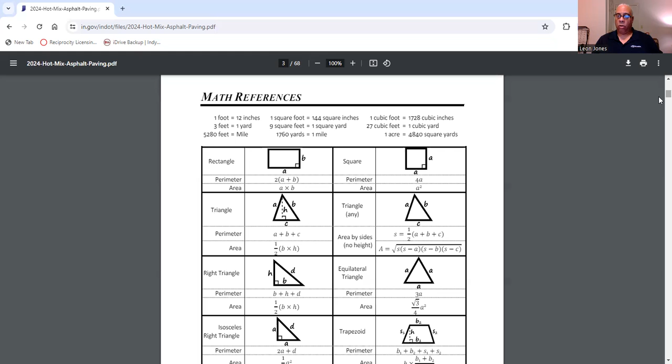Now, when I'm out there inspecting, this right here - the rectangle, square, trapezoid, and right triangle - they're my favorite. Very easy. You're going to have to use these shapes when you're out there getting quantities. Again, you're going to have linear feet or feet, square feet or square yards.

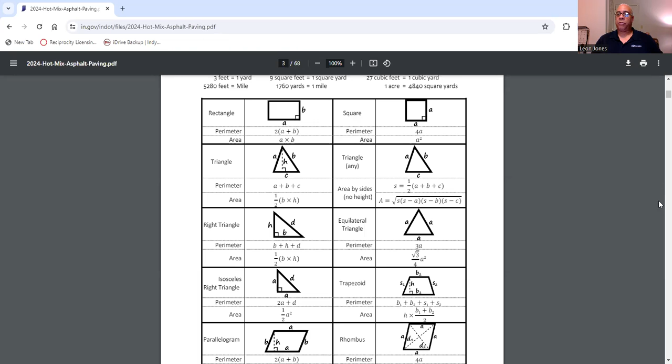Does that go with asphalt? Absolutely. So these are all the shapes you need, and these are areas of circular segments as well.

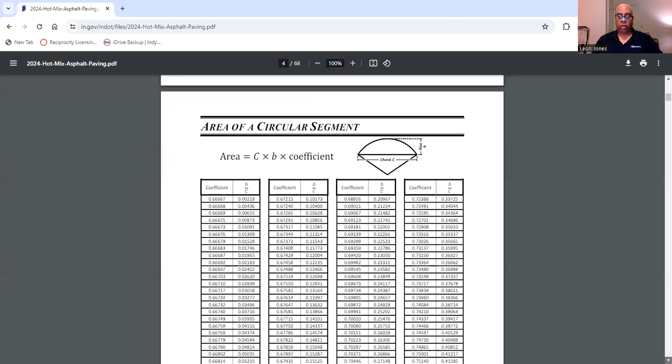But basically, when we get into hot mix asphalt, we talk about the terminology, the type of equipment used for hot mix asphalt, and how you sample it.

Now, like I said, this manual goes into pretty much depth. If you're going to become an inspector for INDOT or a consultant, you go through this manual, you read it, and there's a workbook.

I will tell you, there are some people who don't understand the workbook. If you don't understand the workbook or the problems, email me the problems, and I will do the problems. I will scan them up and show you how I got the answers. Or I can go on Excel and do them for you as well.

Here with Zoom, I've got to learn how to use the whiteboard feature. But first of all, when we deal with asphalt, from this manual...

You're going to have the terminology: HMA, hot mix asphalt, bituminous concrete. These are all names for asphalt. Basically, asphalt is a black cementing material that varies widely in consistency from solid to semi-solid at normal air temperatures. That's what it is.

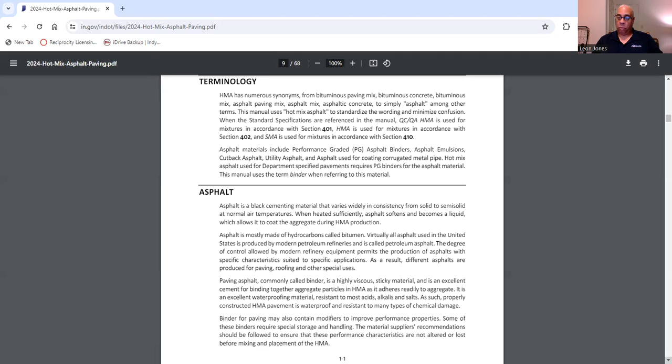But number one, you must download this manual, read it, and get some specifications. It's the same thing I had to do in college. I believe the test might be open book as far as getting into the specifications. Also, learn how to read plans.

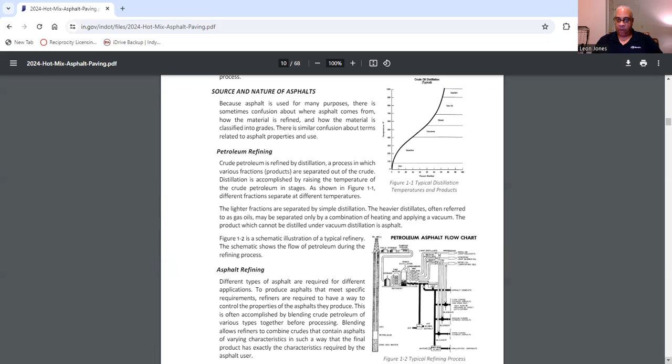Now, you're given a definition. You're also given the source and nature of asphalts, asphalt refineries or refining. This tells you how asphalt is made. Understand the process of where asphalt goes - it goes from the aggregate to the plant.

And what they basically do with the aggregate is add tar to it. Now, when they test the asphalt, this is why you have to have cores. They take the sample, put it in an oven that's about 1,000 degrees so they can burn all the tar off of it. And then they're going to run gradation.

Gradation is when they shake it with sieves. One thing you need to understand when it comes to asphalt: understand the process, understand why rollers have different rolling patterns. Understand that you have to have compaction.

Now, here in Indiana, remember, we're not using the Trexler or the Troxler 4640 nuclear density gauge, but we're using something for your contractors. They're using a non-nuclear, not an SDG, but a Trans-Tech non-nuclear density gauge. It's known as a 380. I think it's a PQI 380. Looks just like the 4640.

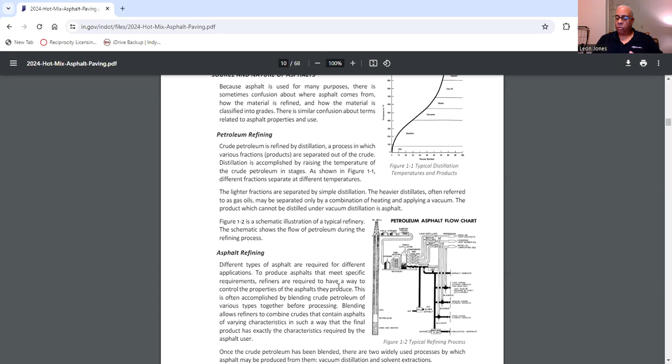Now, generally, when you're out there inspecting, it's very important that you watch the contractor. They could be putting it down too thick or too thin. This manual is going to tell you everything, but you got to read it.

Talks about, here we go, hot mix asphalt, just mentioned it to you. The paving courses: base course, intermediate course, surface course. Now, what's the surface course? The surface course is actually at the surface, that is what is laid and we ride on it. But you have the intermediate/binder and the base course to support it.

And one thing, when we're out there inspecting, you make sure the contractor puts tack. Tack is that black tar. You put tack, and if there are joints, got to put joints. Seal those joints.

You also have dense graded. You have open graded. Now, basically, when we deal with open graded, it's got larger crushed aggregates with really a small amount of fines, and dense graded has small and fine aggregates.

One thing you also need to understand is the design mix formula. Now, generally, when you're out there inspecting, they're going to bring you a design mix, they're going to bring you a certification. This right here tells you the mixing process.

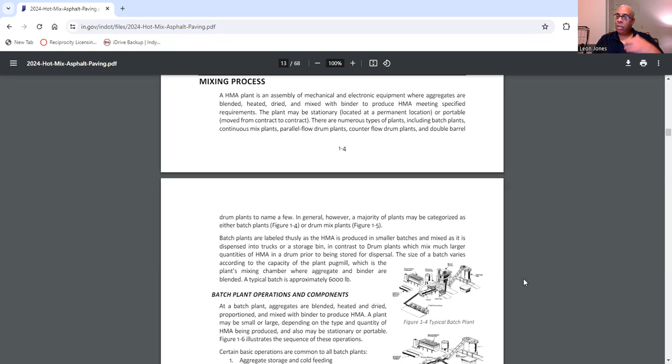What I'm doing, you all are joining me, I'm going over this technician manual. You're going to need to study it because some of these questions, what's a batch plant, what are the different courses, they may be on that test. And in order to pass the test, you need a 70 to pass. Some people can't pass. And you need to understand the procedures. I'm giving them to you right now.

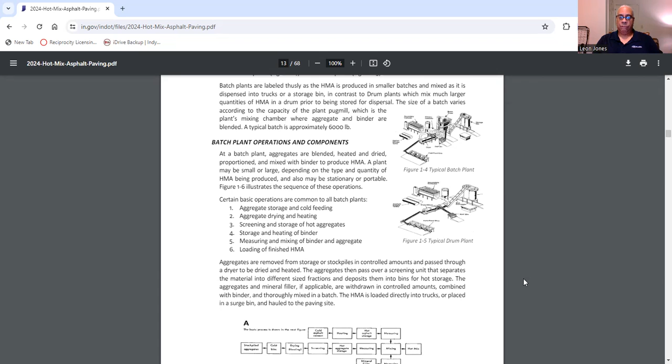Here are the components of a batch plant. You have the batch plant, and you have a drum plant. Everything is right here. Let's give you an overview, understand the process, the batch plant operations.

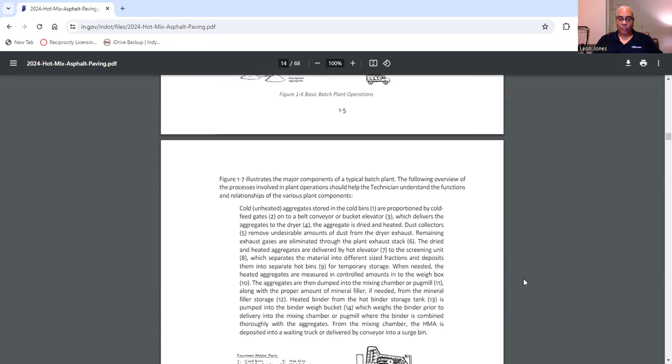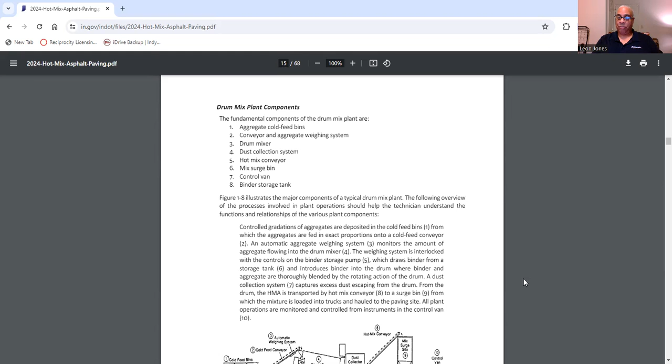Also, I'm just scrolling down. It's going to tell you what drum plants are, batch plants, the components. I actually have a video that I did months ago about this. You're seeing it again, but you need to make yourself familiar with everything.

Different mix composition types. Now, when you are doing asphalt, make sure the contractor has a quality control plan. And the asphalt, now, I want you to understand this.

If they're putting down approaches, you look in your items or your CIB. This is very important because if it's QC, QA, you have to test it. If it's not QC, QA, you don't have to test it at all.

And again, when you are testing, follow the frequency manual. This is all in the ITM, Indiana Test Methods. I know 580 or 583, that's sampling. Quality control plan, everything is linked up to the specifications. You want to pass that test, this is what you have to do.

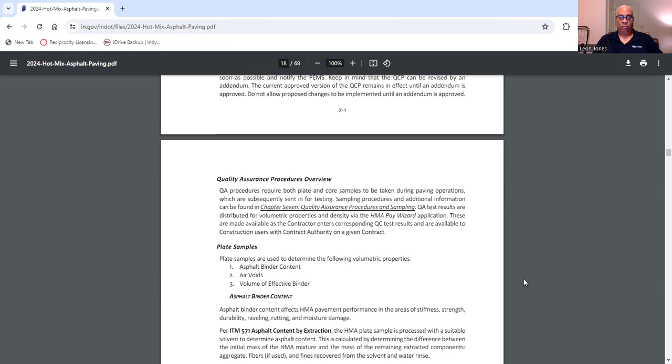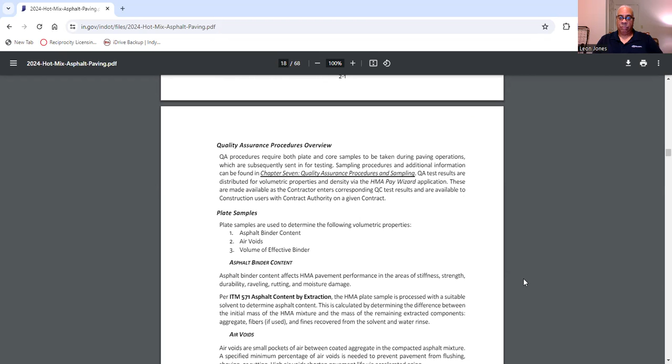Now, wire plate samples used again for the voids, effective binder, binder content. Right here, you're being told about air voids, core samples. Core samples are to determine your in-place density.

And one thing, when you're doing asphalt, density is very, very important. The reason why density is very important, I want to see whether it's meeting the load requirements or the ESAL. The ESAL deals with axles. There could be 0.3 to 3 million, 3 million to 10 million.

Deals with axles. Now, in some states, it used to be this long piece of equipment, it was called a profilograph. What that profilograph measured, it would create a printout. It would measure smoothness. If you had bumps, you'd see bumps in the graph. Not many places use that piece of equipment anymore. They're using a van instead.

IRI, that's wheel roughness. This tells you about cores, smoothness.

Different types. When we're dealing with surface, you're dealing with 9.5 millimeter, 370. Well, some places use 70, some places use 64. Generally, 64 is used on the shoulders, 70 is used on your main route.

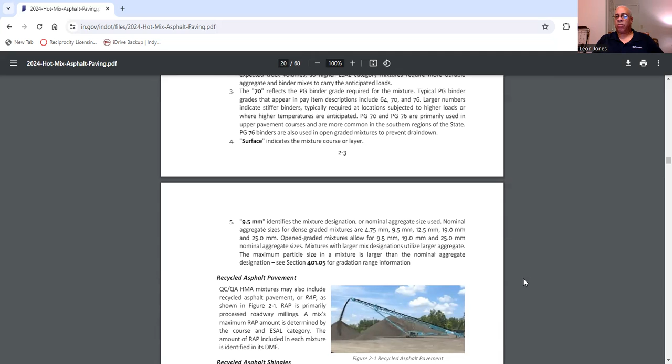Now, what that is, the contractor, when they mill off the existing asphalt, they save the millings, they take them back to the plant, and they recycle them. And that's asphalt, it's what we call asphalt, RAP, recycled asphalt pavement. And then we also have RAS, recycled asphalt shingles.

We're in the green. And when we mean the green, yeah, the green means money, but also the green means sustainability.

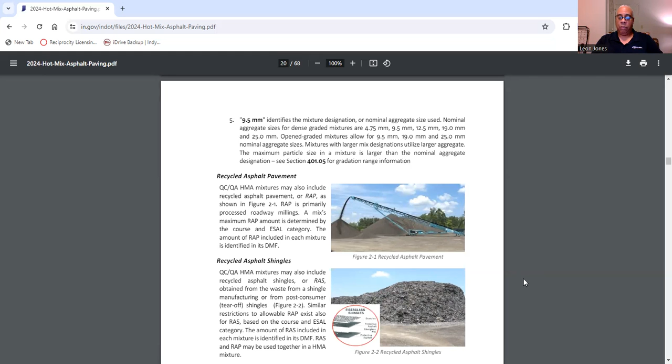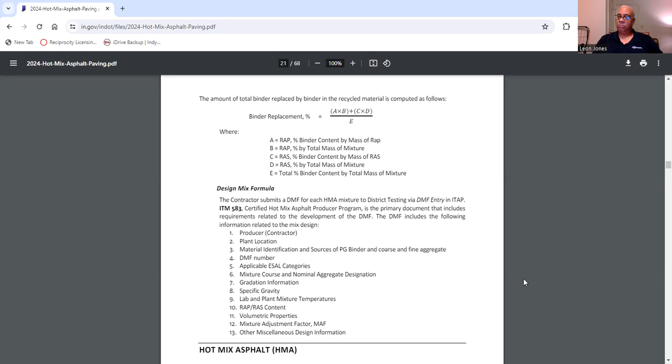And I'm just taking you through more information. This is what you have to have when you are utilizing or checking the design mix formula. I'd say you're basically checking the design mix formula.

When it comes to quality control plan, your contractor should have a QC plan. Pay item description, that's right there as well.

402 HMA pay items have a 402 mix type. Yeah, types B, type C. Then you have SMA, which SMA is your stone matrix asphalt. It's just a little bit more expensive, more stone. It's real good material.

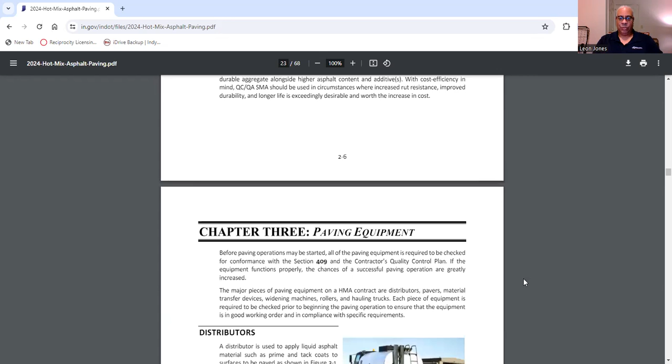Now, what you need to understand too, as I move on, paving equipment. And you have your distributors.

Now, when you're inspecting your asphalt, you want to make sure that the contractor's distributors are correct. When he puts tack down, you want to make sure that that tack is going to be brown when it's laid. When it breaks, it turns black, but you want to make sure that all of the nozzles are working. If they're not working, you're going to have to tell the contractor to stop tacking until they get the nozzles to work.

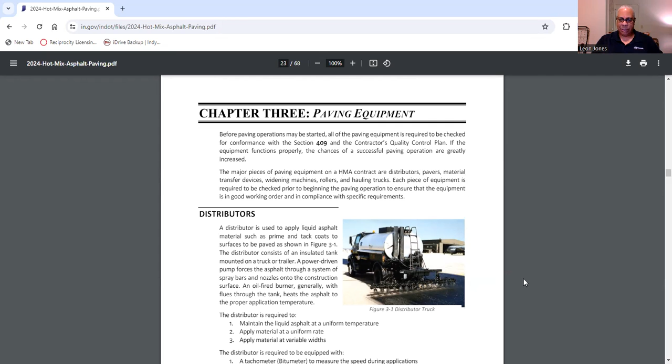You have to have the liquid asphalt at a uniform temperature, and it's got to be placed at a uniform rate and variable widths as well. That's the tack truck. And you got your pavers.

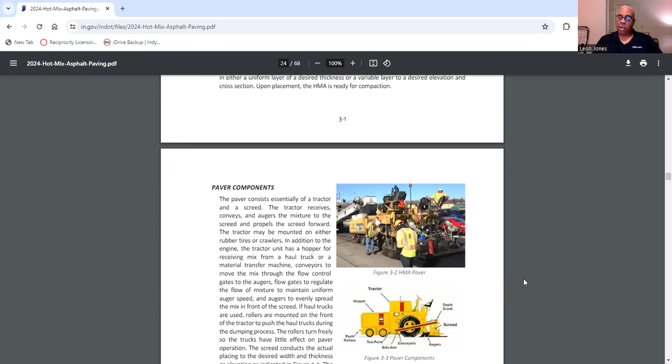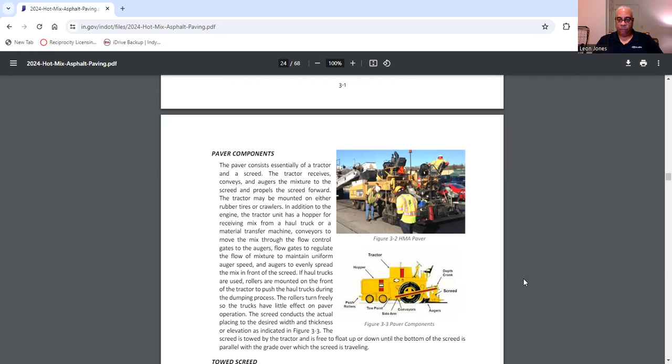Most of the contractors use what we call a Blaw-Knox paver. That's what this one is. It's got your components, your tractor, your screed, your augers, your conveyors, which a screed looks like.

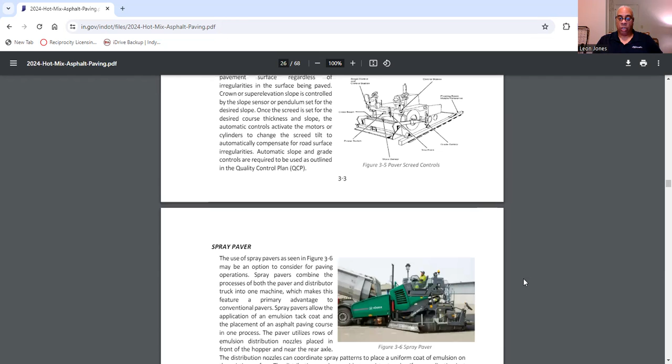That's what these screed controls look like. Pavers come in different sizes.

Then you have MTVs. Your MTV is your material transfer vehicle. Aggregates all of the material, keeps it mixed.

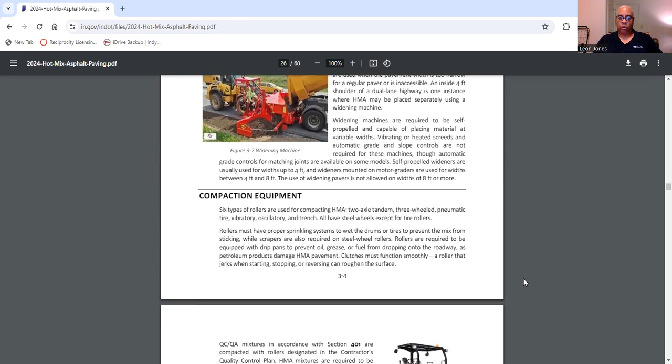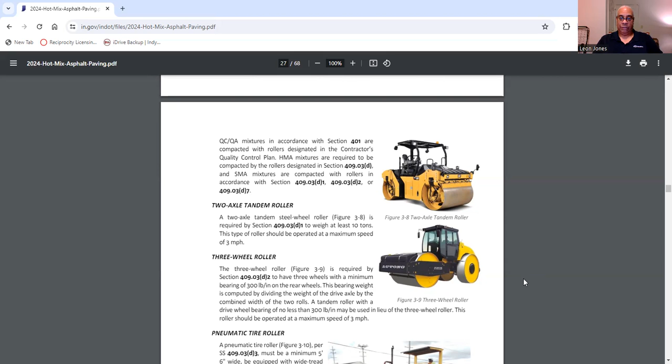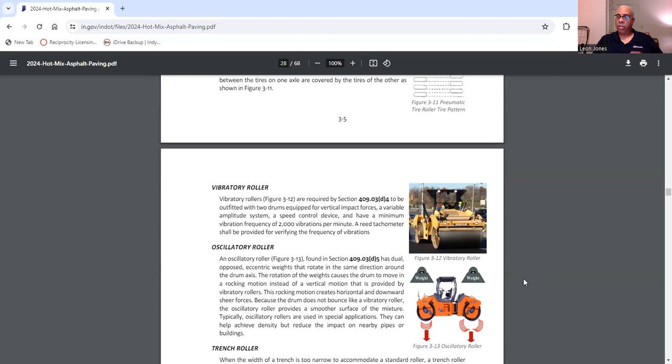Compaction equipment is basically your rollers. They're your rollers right there. Again, pay attention, you need to know this when you're out there inspecting. Some of this information may be on your test. There's two types of rollers that they use, static and vibratory.

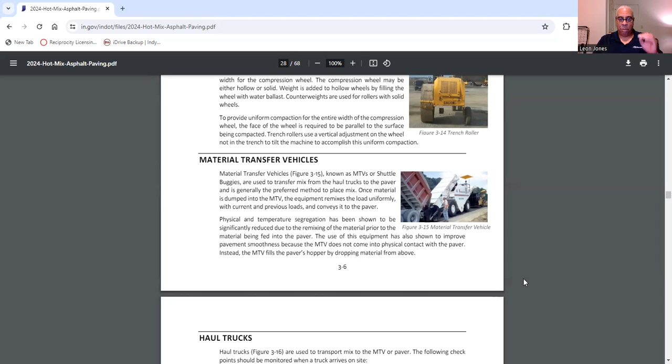And MTVs, again, call them shuttle buggies. They use to transfer mix from the haul trucks to the paver, and it's generally the preferred method to place mix. I just told you about the segregation.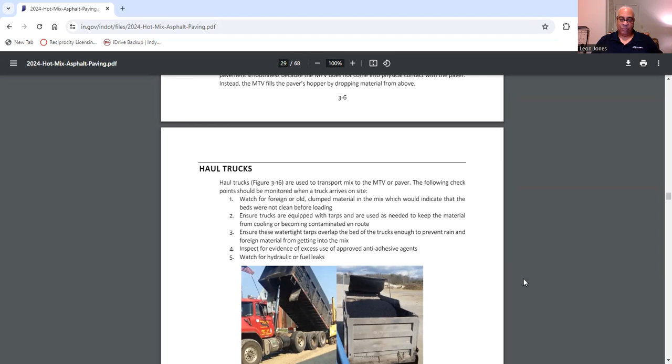Haul trucks, generally your dump trucks. Generally, your dump trucks have roughly on an average 20 tons. You have some of the longer ones that have 23 to 25 tons. You have your hand tools, like your shovel.

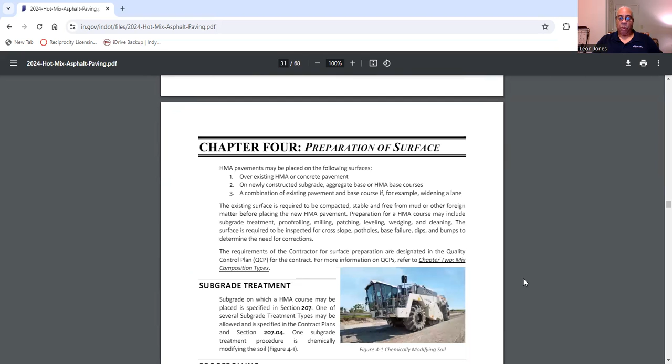Preparation of surface. Now, how do they utilize the surface? Well, some utilize subgrade treatment, like a chemical. Proof rolling, that's when you're working down there on the base.

Now, here in Indiana, if they're putting subgrade treatment down, you have to use a piece of equipment called an LWD, which is a lightweight deflectometer. And then, or you put anything down on that base, you have to see if it's pumping. And what I mean by pumping, is there water? If there is, mark out the areas where you have water. You have to cut that portion out.

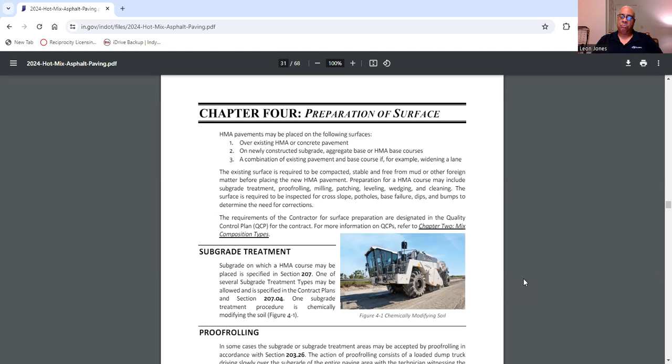Let me see, milling. Milling is when they take the old asphalt, put it in a dump truck, hauls it off. The millings, again, are used to create what we call the RAP, the recycled asphalt pavement. What a milling machine looks like.

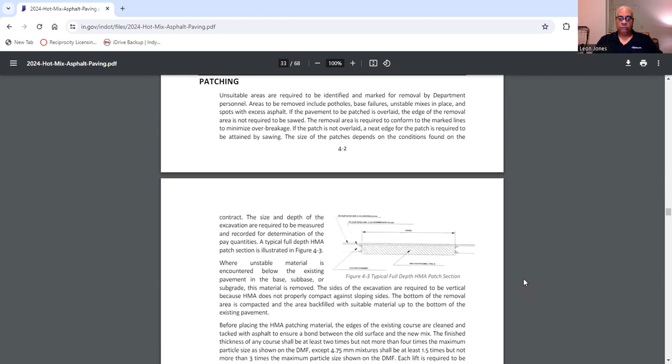This is some of your equipment, it's patching. Make sure they wedge it. And contractor, I know on the INDOT project, you can keep it open for 7 days. I tend not to let the contractor keep it open that long.

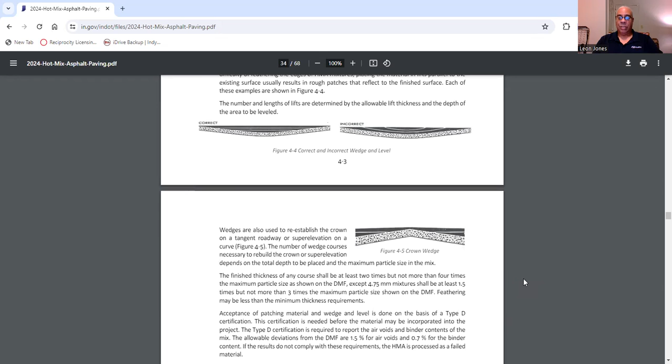There's signs out there that say rough road or uneven pavement. Surface cleaning, you got what we call your sweeper trucks, your tack coat. That's what it looks like. See how uniform it is?

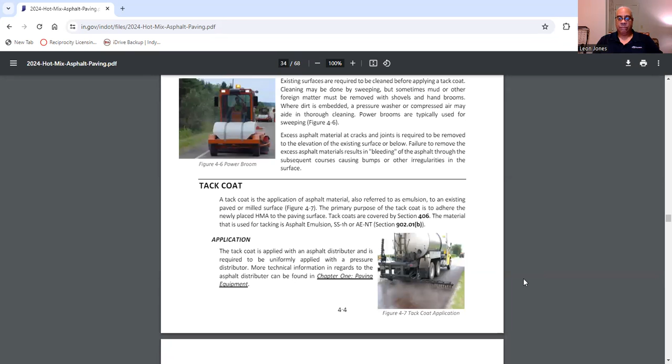Now, this is what I don't like because the applicators on the tack truck weren't corrected. You have no uniformity. I would make them tack it again.

Prime coat. All this, by the way, all these procedures are in the 400 section of the INDOT specifications. So even though you can pass a test, you must be familiar with the plans and specifications.

Mixed placement and compaction. Again, you must understand the temperatures, must understand what QA/QC is or non-QA/QC, air temperatures, surface temperatures, because there's certain times that you cannot lay asphalt. Now, if it's after the construction season and you want to lay asphalt, INDOT must approve it.

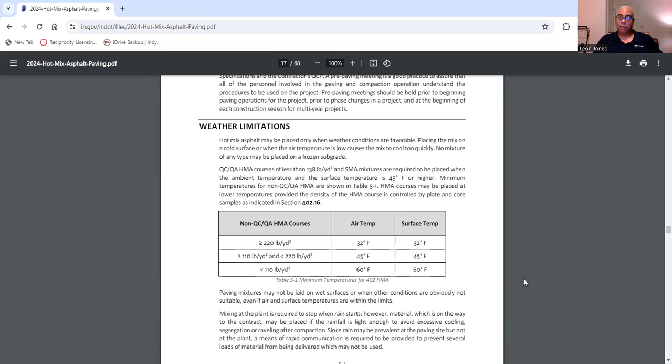Make sure the joints are sealed, fog sealed. Now, what's a transverse joint? A transverse joint is a joint that goes across. Like if you have 24 feet of lane width, well, generally that transverse joint is going to be 24 feet in length. It's going across. Now, longitudinal means it's going north and south, or it could be going east to west, depending on the orientation of the road.

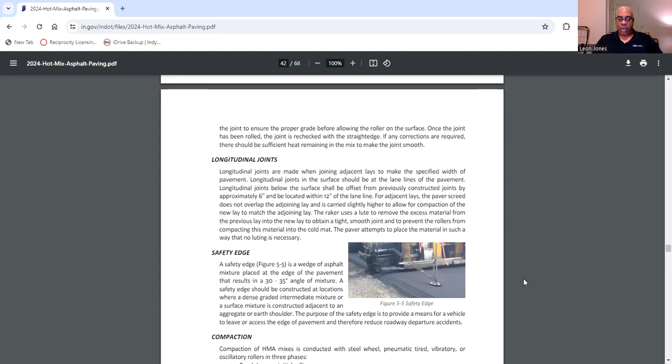Got safety edge, compaction, breakdown rolling, intermediate rolling.

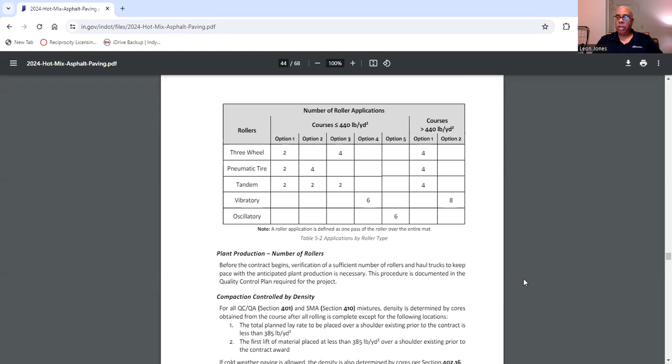And like I said, this is all basic. You're going to need this if you want to pass your test, now to read this information. And even if you pass the test, keep this information. Make yourself a checklist when you go out there as well.

It talks about joint sealant, joint adhesive, tonnage, thickness control.

Here's what I'm saying, 9.5, 12.5. I said 12, but it should have been 12.5, my correction. This is generally the surface, the binder or intermediate, and the base.

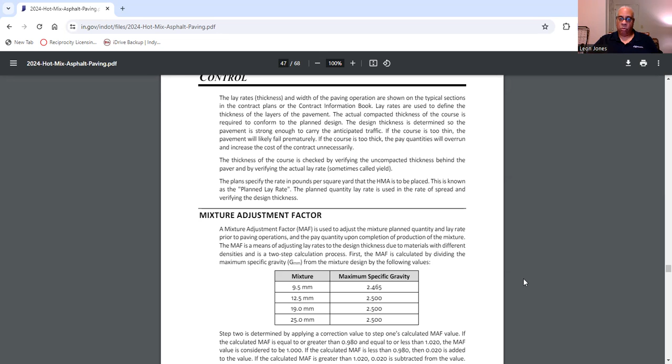Sometimes you have to have a MAF, which is a mixture adjustment factor. Here it is right here. Now that's very important for the pay quantity.

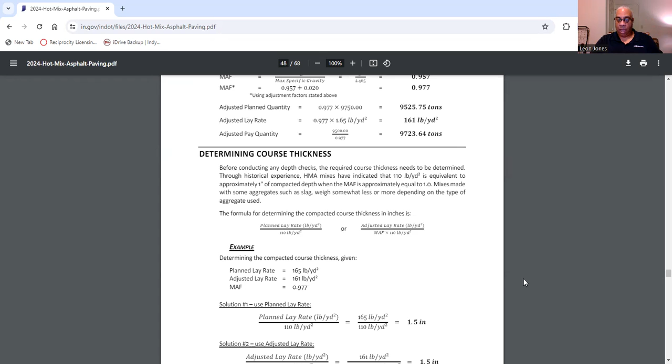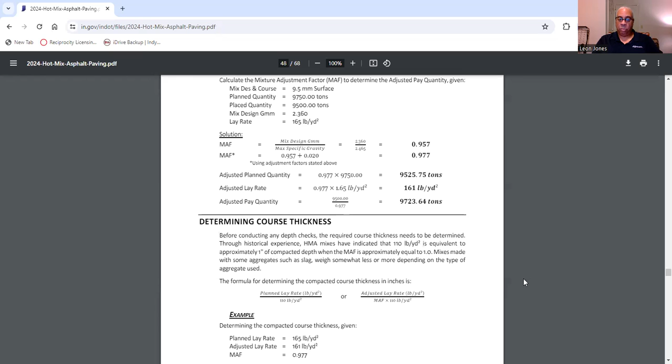Now, these will definitely be on the test. So this is how you come up with the lay rate. These are very important, determining course thickness. This right here for your mixture adjustment factor, that's important. But this is definitely important, doing it by hand.

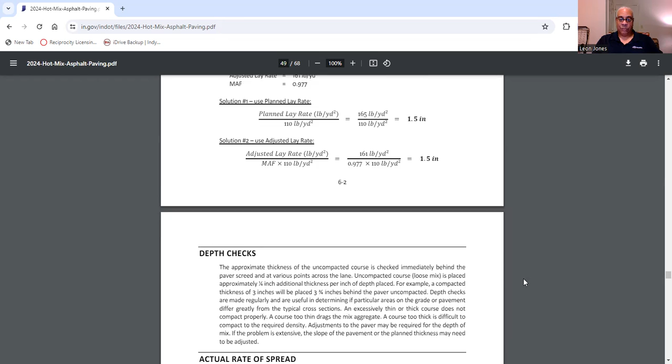The contractor usually, you'll see him poking the rod, checking the depth. Also watch your stationing, sometimes station sticks get knocked down. Make sure the contractor puts back their stationing. You need your stationing because you need to know when to start and when to stop paving.

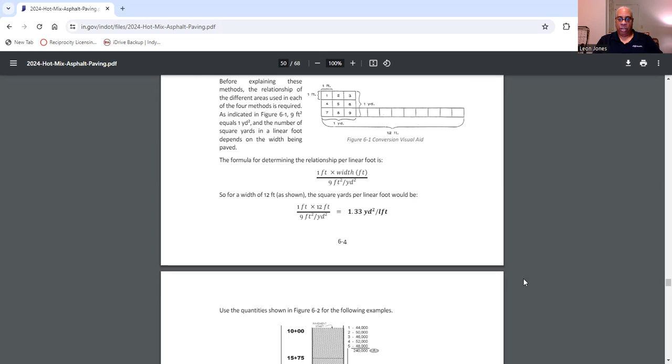Here's something else you need. Determining a relationship per linear foot is right here. I mean, this is definitely important right here.

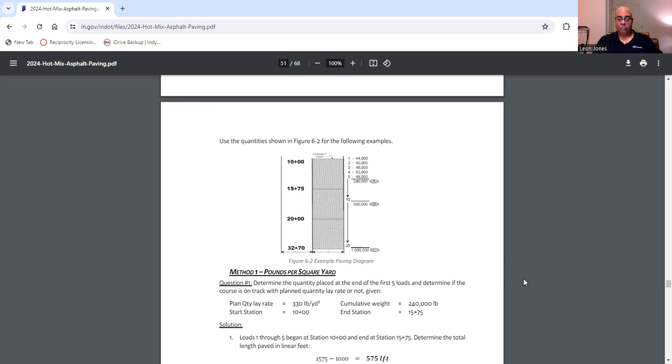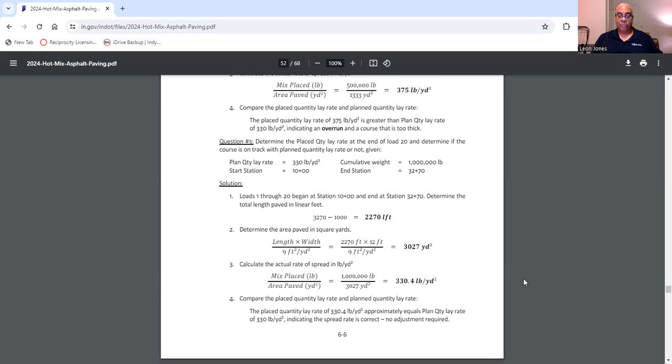Here are all the methods, all of the methods. And this is definitely on the test. Everything you see right here.

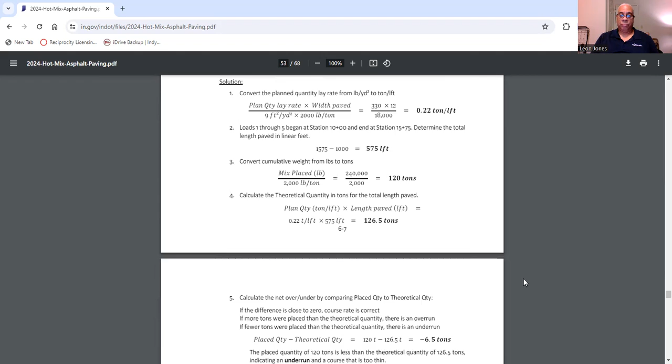But it should also have in here, we go, something else you need to know, the sampling. Lots and sublots, it's very important.

Again, for your base and intermediate here in Indiana, one lot is 5,000 tons. When you get to your surface, it's 3,000 tons. When it comes to sublots, your base and binder or intermediate are each 1,000 ton sublots, where your surface is 600-ton sublots.

This is very important because this is where you're going to get your samples and your cores.

Sample types. Now, I'm going to be a little biased here. I'm not in favor of all these pizza boxes here. That's what the pizza boxes look like, where you put all that sample in that pizza box. I prefer putting about maybe 10, maybe 15 pounds in a cylinder mold, carrying that off. But that's what the sample looks like.

It's your plate sample. It's very important because as an inspector, you'll be out there while they're taking these plate samples. And of course, these core samples, they're going to give you density.

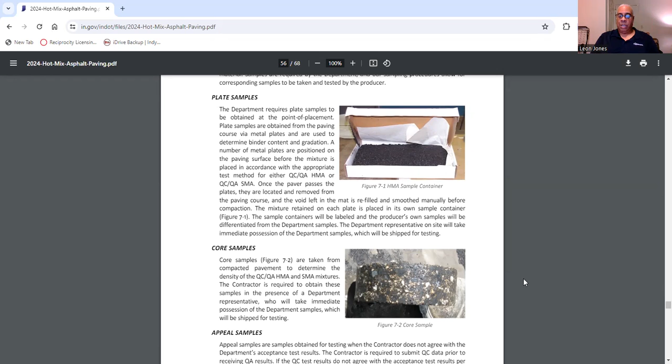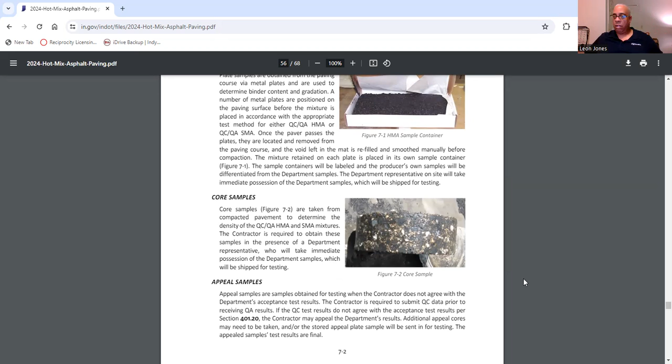Now, in case there's a failure, there are also appeal samples. They're basically samples that are obtained when the contractor does not agree on the department's acceptance test results. So basically, when you're out there, the contractor is going to take some testing and the department is going to take some testing.

Truck samples, you can also take them from the truck. Most people don't do it. They utilize the plate samples, but you can also sample from the truck.

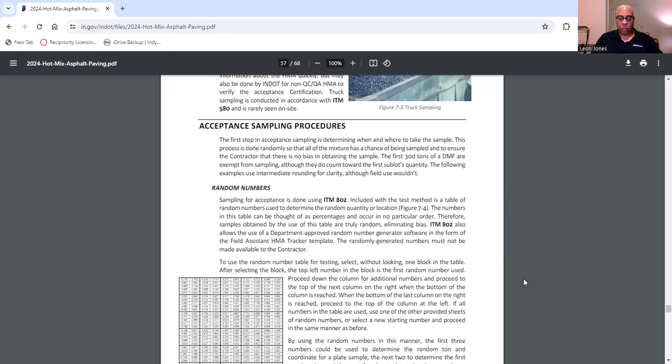Then when you have acceptance samples, you have random numbers. You can't quite see it, but these are your random numbers right here.

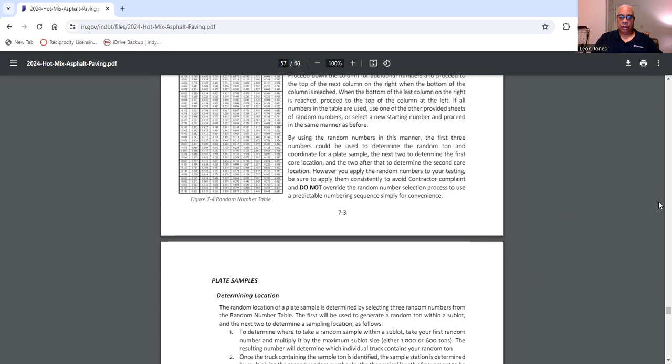Plate samples. In the future, I'll work out some mathematical examples from my head, from real projects, and I'll show you how to get the solutions they're looking for.

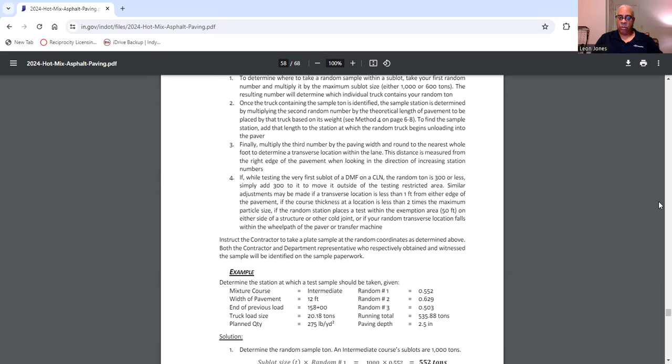Plans, specifications, and the understanding of how samples are taken. You must take the temperature with a temperature gun. This right here gives you the information of where the samples are going to be taken. Now, this is important too.

Suppose you have a contractor laying bituminous at 1,000 tons, and your random number is 0.552. What you're going to do is take that 1,000, multiply it by 0.552, and you get 552 tons. I'm going to be biased because I like to take my samples right in the middle, so 552 is pretty good. Now you're also going to have running totals.

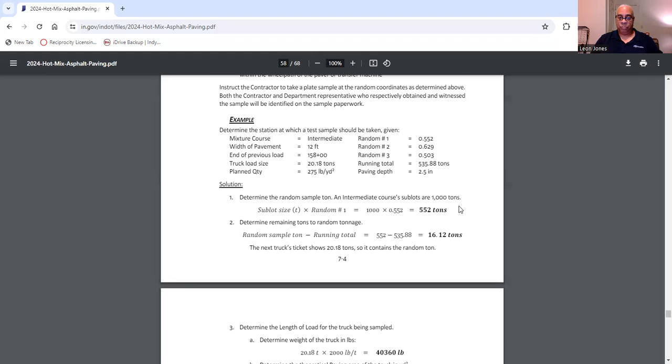You can determine the weight of the truck, the theoretical paving area, the length of the road. That's also very important, because the thicker the mat, the slower the speed of the truck, and the thinner the mat, the faster everything goes. So when it comes to surface courses, trucks travel a shorter distance compared to when mats are put down thick. They might travel a little further, but it's going to be a little slower.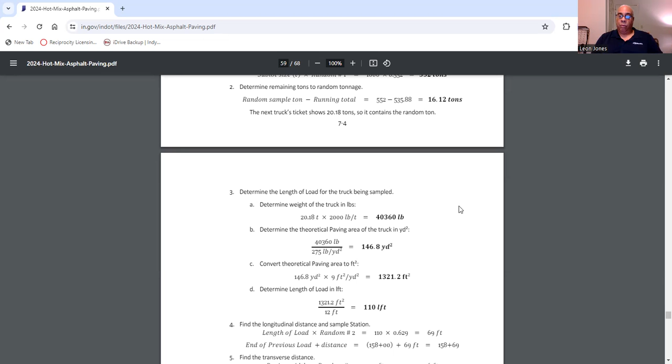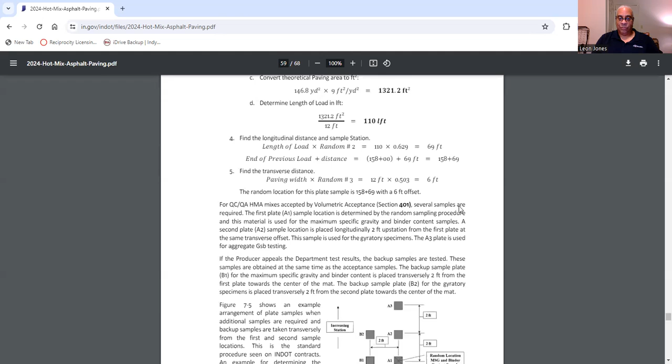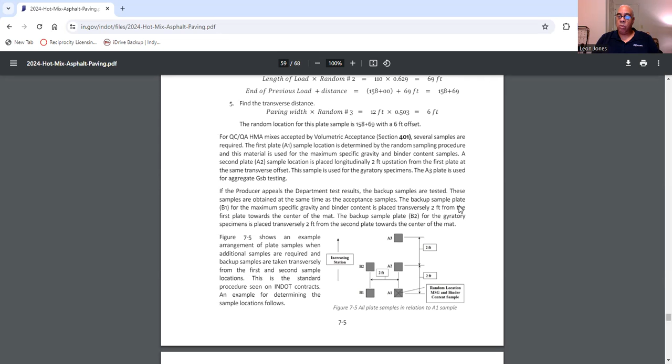Here's all the information right here, and this is how all the plate samples are set up. From this sampling part, and collecting your tickets, that's really the bread and butter. Just watching how the contractor places the asphalt - asphalt's pretty easy, but it's an arduous process and it can be confusing if you don't follow the procedures.

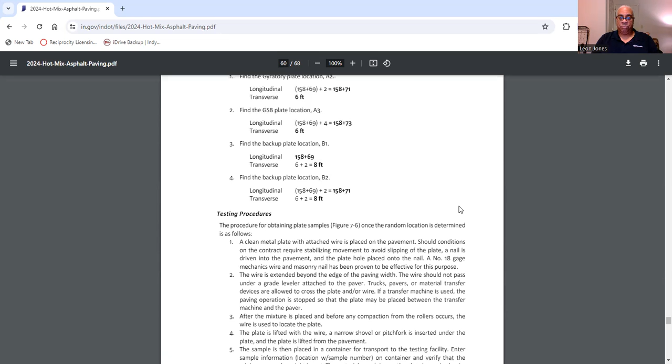Here's all the information right here. This is what the plate samples look like, and this is what the plates look like when they're set. This is how they pull - there's a cord on each plate. Pull that cord out, they dump the sample into that pizza box, and the pizza box is weighed. Then you put the information on it, like your R number, your station number, your tonnage, your date. Is this A or is this B? I'm giving you some of the answers right now for your test.

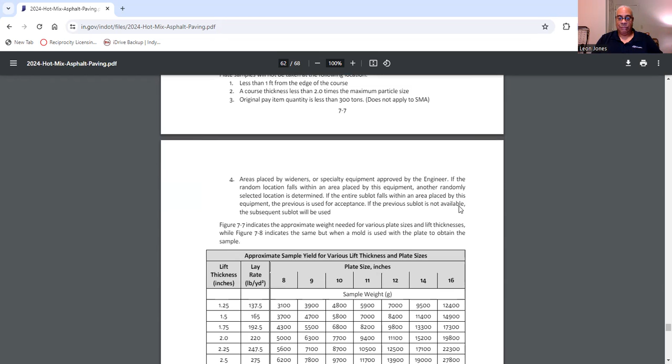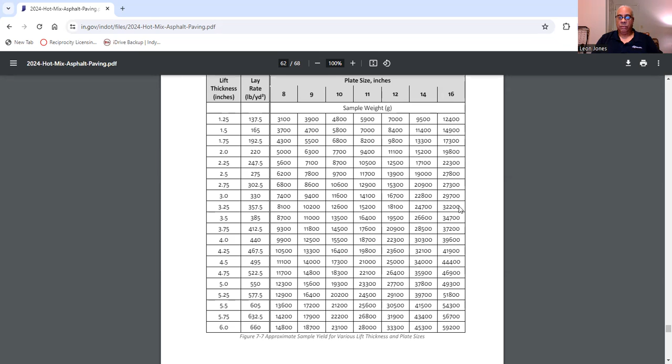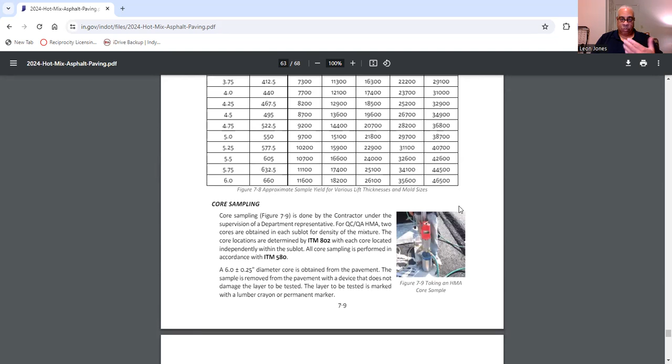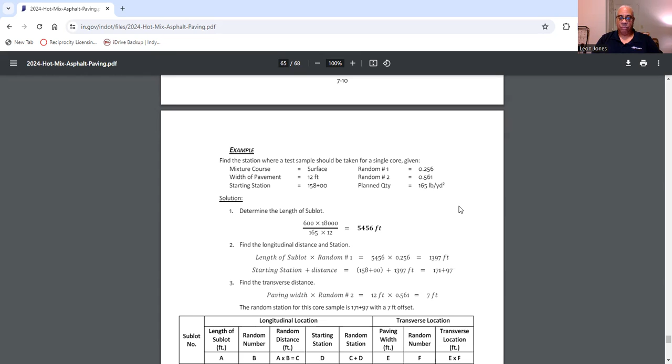This is all the information. You want to know what your lay rates are? They are right here. Everything that you need. This talks about core sampling again - length of sublot, things you need. Here are the examples, length of the sublot. This is a good chart to use - I don't see too many people using it. I've used it, it's very good.

Because one thing you need to understand about asphalt and taking tickets - you need to track everything. You need to put it in your daily inspector's report, how many tons were laid that day. Some people forget to do it. I know when I was doing asphalt, no matter how late it was, those tickets were getting calculated and put in my daily inspector's report that night, so we could start fresh tomorrow.

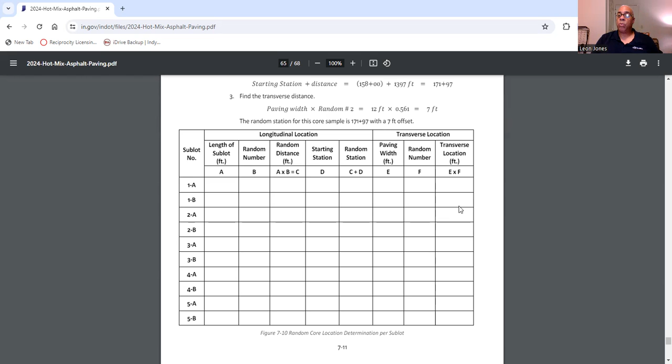But again, I'm just giving you information overall. This is field assistant. And remember I told you about checklists? Get your checklist.

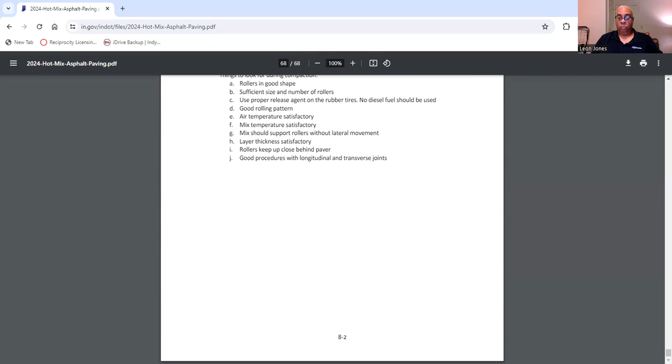That concludes this presentation on HMA, hot mix asphalt. I utilize the manual - I will put the link to the manual under my comments section. But again, tell me what you think.